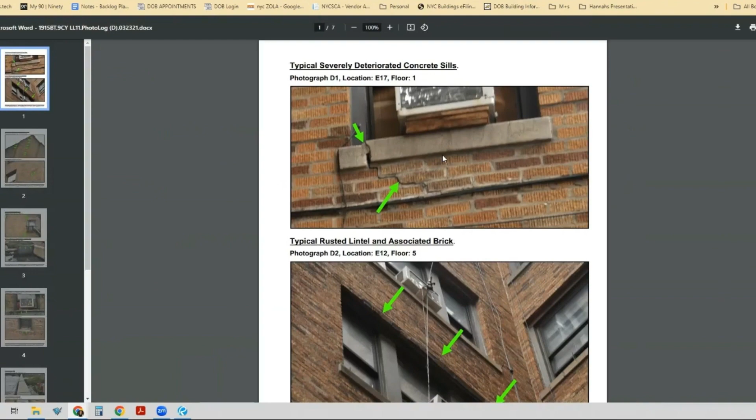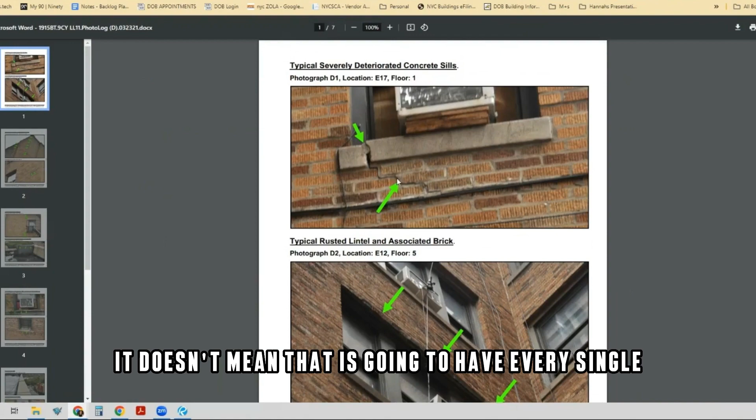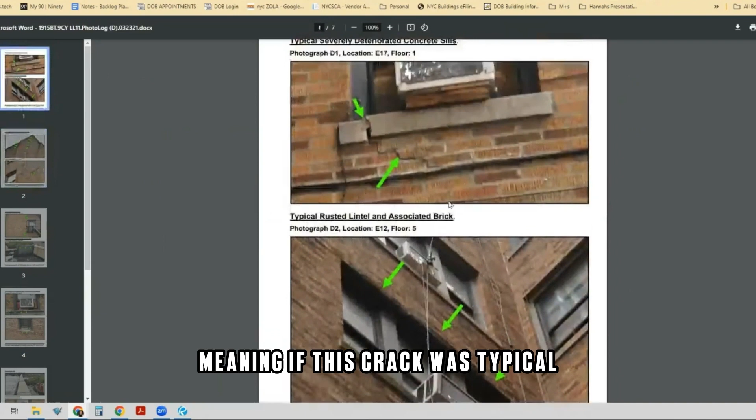Detailed photographs will be the document that has photos of deficiencies found by the QE of record. It doesn't mean that it's going to have every single photograph of all the deficiencies. Typically, the QEs of record will include one typical photo per type of condition, meaning if this crack was typical, they may include 2 or 3 and indicate their location on the top or on the bottom of the photo supplement.

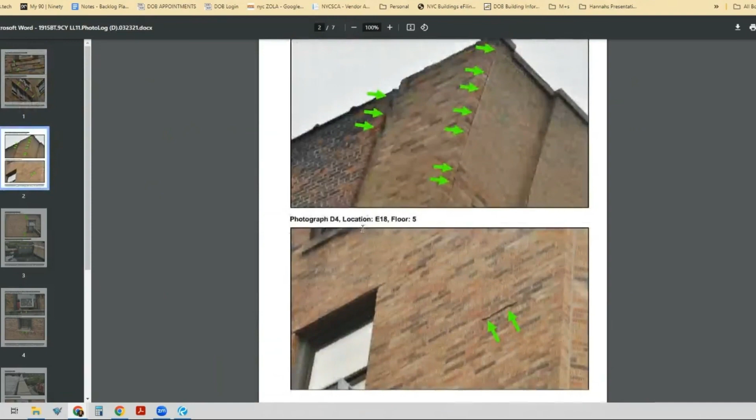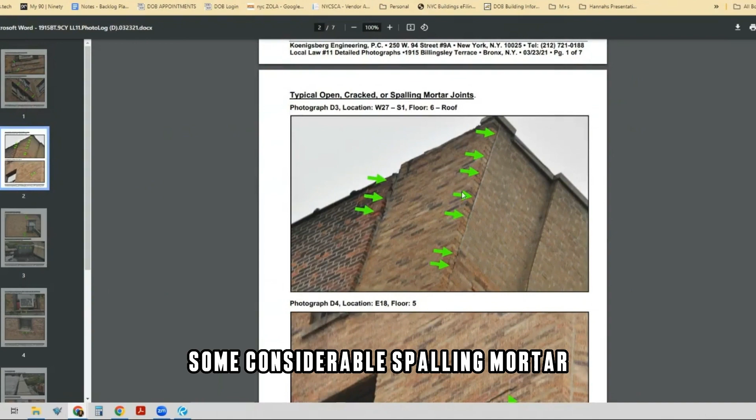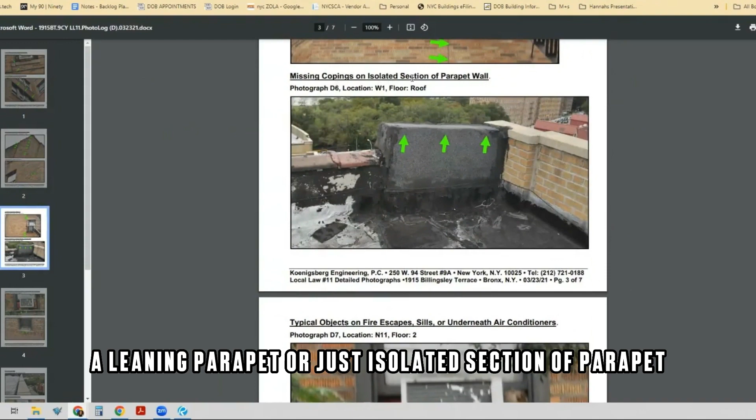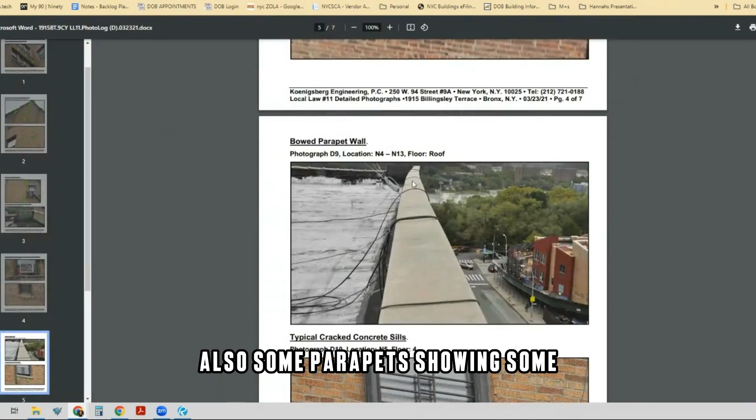So in the case of this building, we can see that there were some cracks along the walls, some deteriorated or rusted lintels, some spalling mortar along some of the corners, some considerable spalling mortar, a leaning parapet, or just an isolated section of parapet, and improperly installed air conditioners. Also some parapet showing some signs of movement. So we can see that the report included some signs of the parapet that had some shifting.

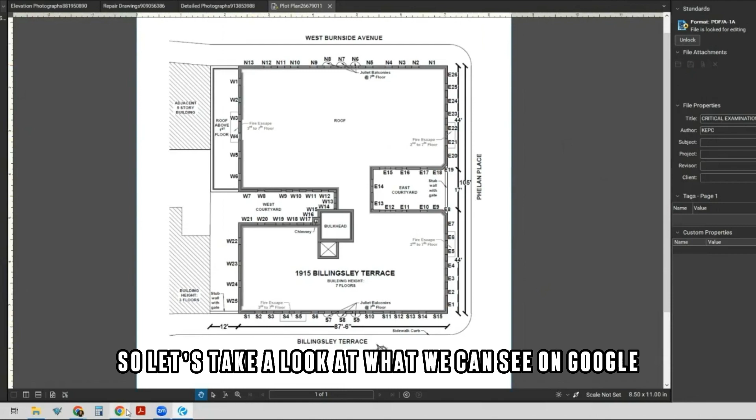According to the report, this parapet was along location W1, which based on this plot plan is the northwest corner. So let's take a look at what we can see on Google. And yes, that coincides with the northwest corner of the building. The section of the building that collapsed is the northeast corner. It's this area right here. So there were no signs of parapet movement along that parapet, along the roof level, at the time of that report.

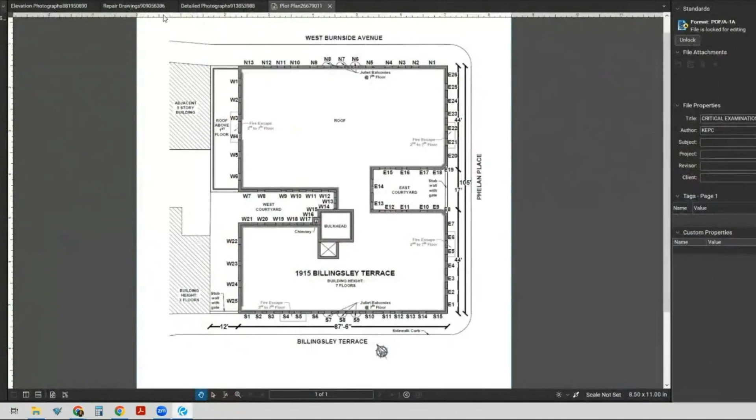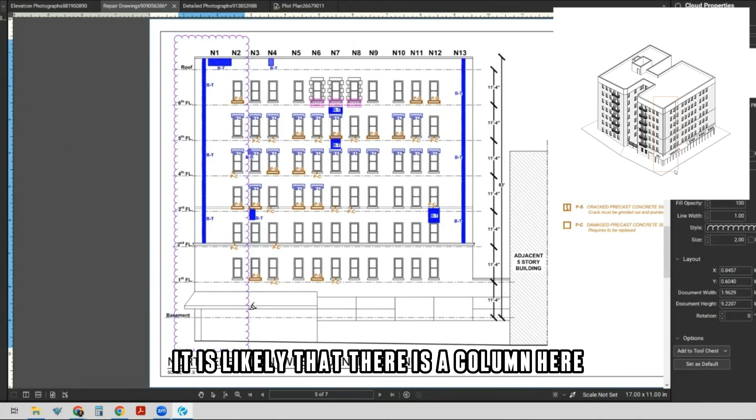So something else that we can see on the drawings is that the last report did not include any deficiencies along the northeast column. So this is a section that collapsed along West Burnside Avenue. The collapsed sections of the wall extended all the way from the corner to the first window line. If the collapse did not continue, it is likely that there is a column here supporting the rest of the facade.

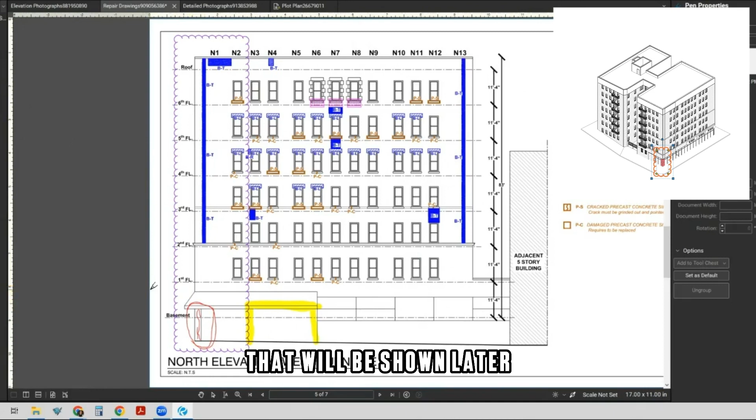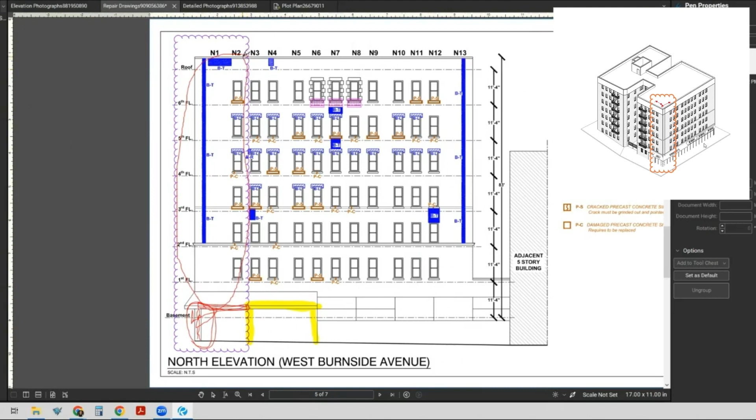Our theory is that this column, due to its cracks and deterioration noted on the photos that will be shown later, had collapsed, leaving spandrel beams spanning between the first and the second column. Once the column collapsed, the spandrel beams between the first and the second column went down, and the upper section of the facade was left without support. That's what we believe happened in this collapse.

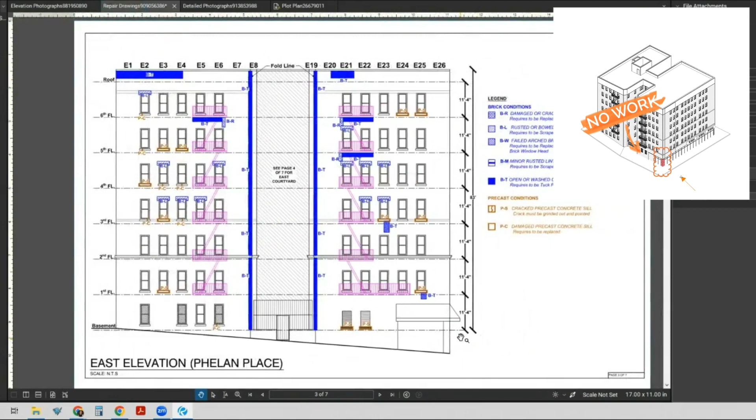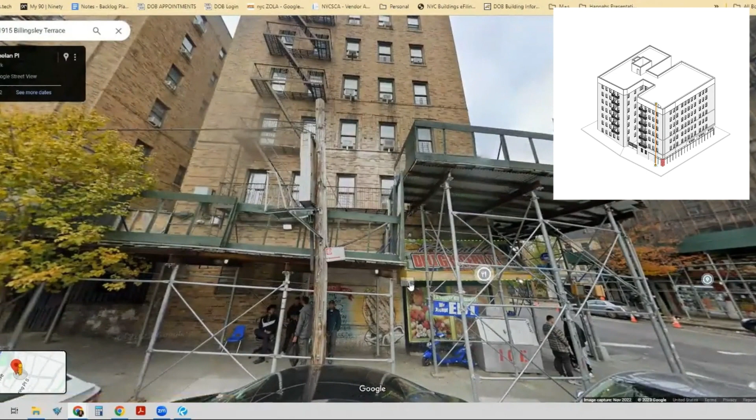We look at the other side of the building. We also don't see any specific work or deficiency included on the last report. We also see that the location of these openings appears to be larger than it is in reality. If we look at the building records available in Google, we can see that the opening of the storefront ends along the right window jamb of the second window line, which coincides with the section of the facade that collapsed above.

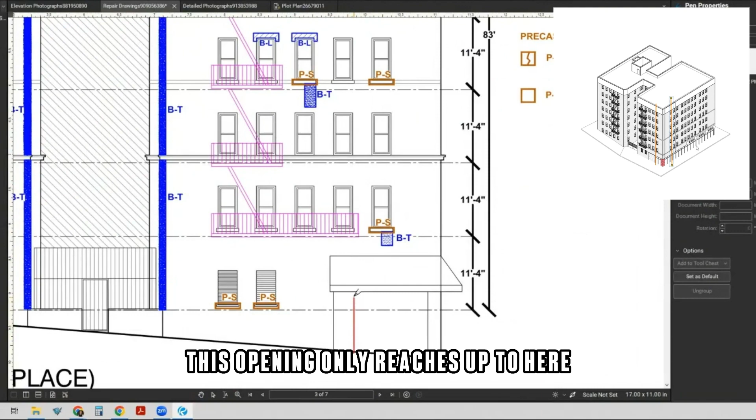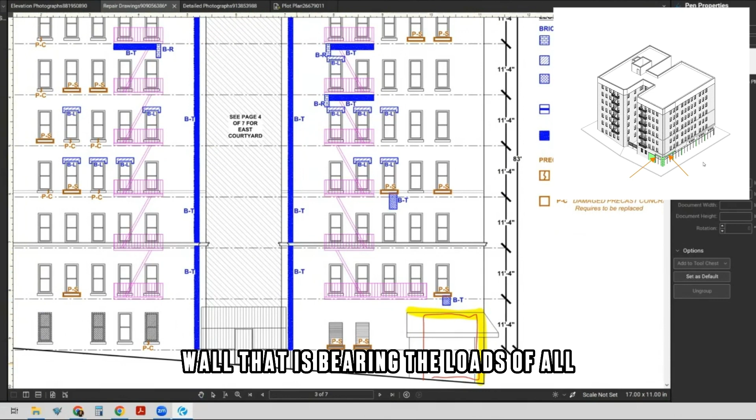So, in theory, this opening only reaches up to here. And that also means that there is a beam spanning between this column and the first column, or between the column and the section of the wall that is bearing the loads above. And the section that collapsed earlier this week extends from the corner to the window jamb on the second window line.

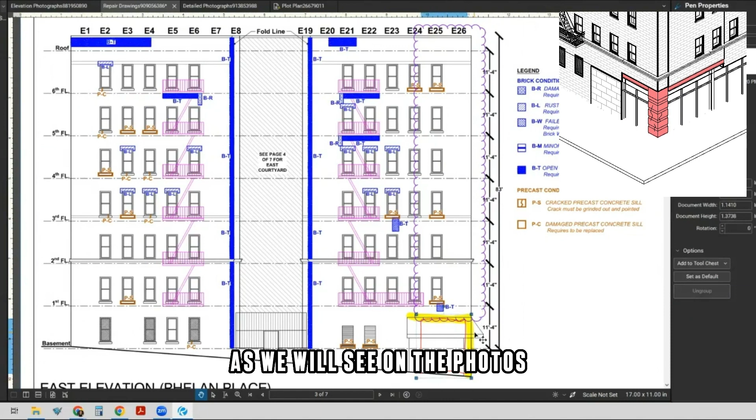So if we consider the extent of the corner that collapsed, we notice that it was limited by the storefront openings. As we will see on the photos to be included later in this video, the column had cracks dating back to 2014. Photos included on the last FISP report also show cracks along the subject column.

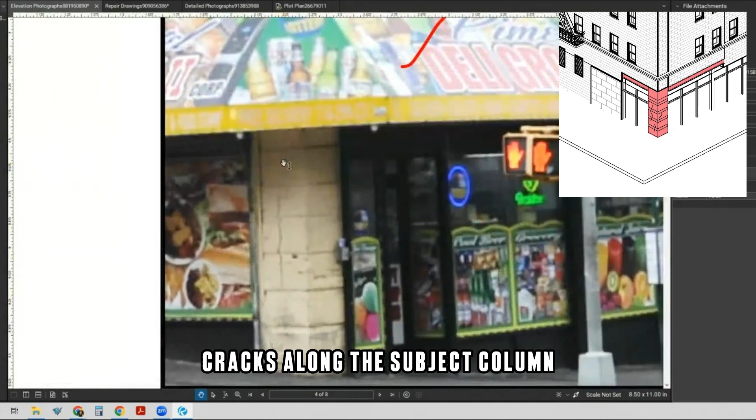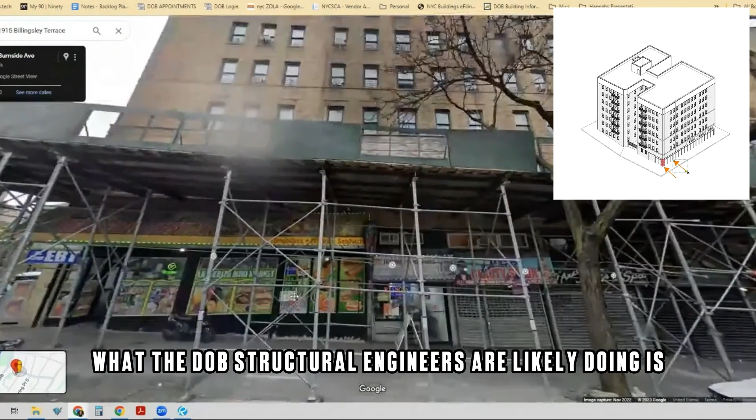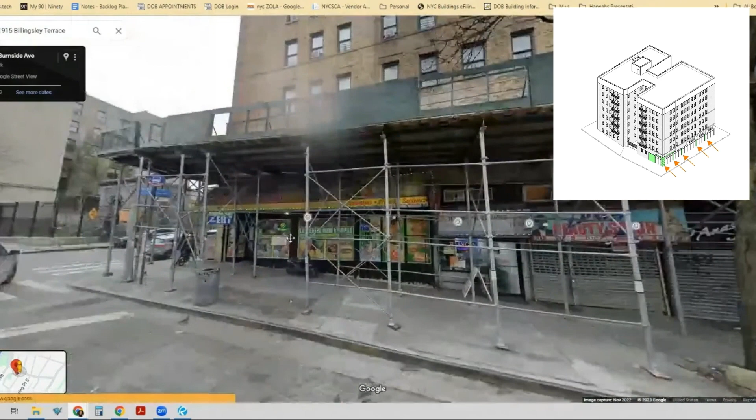Our theory for the opposite facade is that the section collapse extended between the first column and the second column, somehow located between these two storefront openings. We can see that this section is slightly larger or thicker, most likely to accommodate the second column. What the DOB structural engineers are likely doing is reviewing the condition of the second column and every other column along this facade, as we see several openings on this elevation, which is not what we see on Phelan Place.

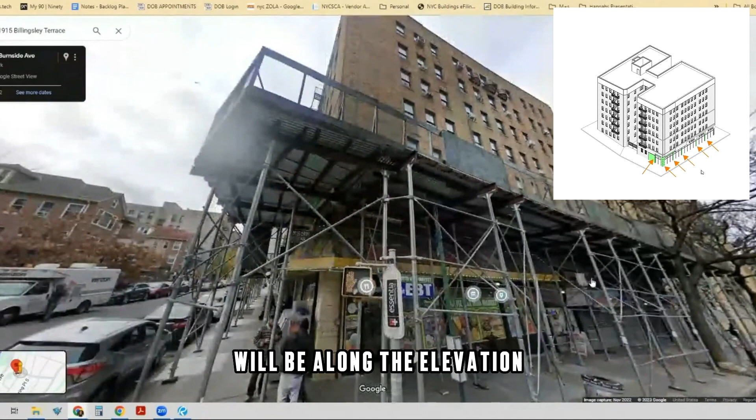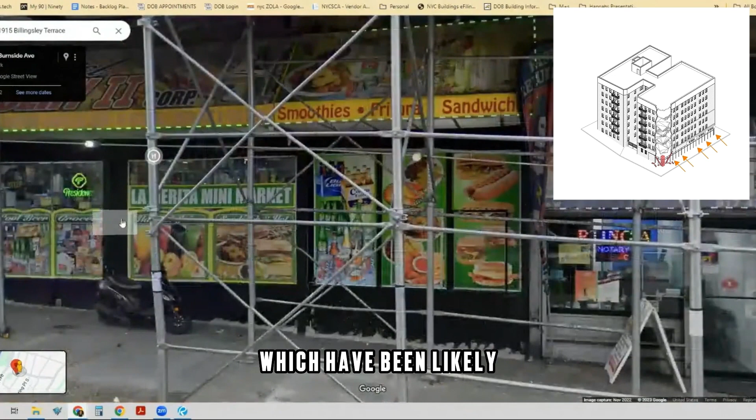Along Phelan Place, we see that the storefront is actually rather small, and the majority of the facade is supported by this masonry wall. So if further collapses are likely, they will be along the elevation that has the least number of bearing walls or bearing wall area. So it is important to review the conditions of these columns, which have likely been disturbed during the installation of these storefronts.

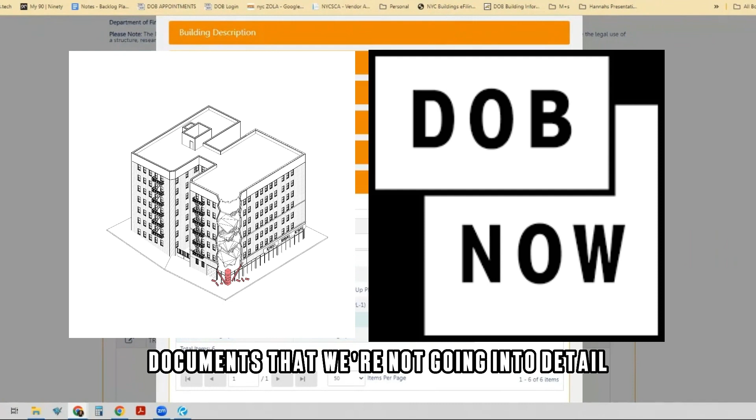So this concludes a quick review of the records that are available on DOB Now. There are some more documents that we're not going into detail on, but we're focusing on the documents that have the most graphics, such as detailed photographs, repair drawings, elevation photographs.